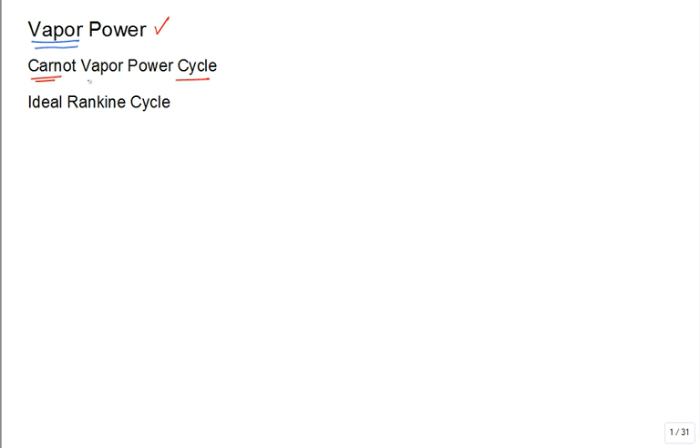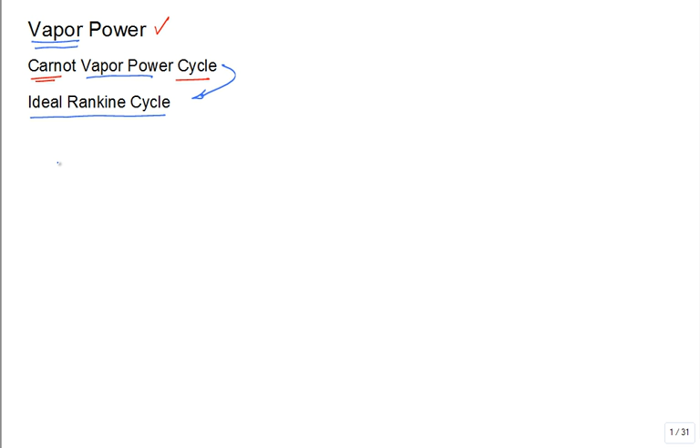To begin, we'll review the Carnot cycle, and the Carnot cycle can be implemented with a working fluid that undergoes a phase change. It doesn't have to be an ideal gas. If you look back in Thermo 1, it introduced the Carnot cycle primarily thinking about an ideal gas. But you can also look back in Thermo 1 in that previous section and you'll see, oh yeah, we did talk about the Carnot vapor power cycle. And that helps us understand what we call the ideal Rankine cycle, and then we modify the ideal Rankine cycle to be actual Rankine or vapor power cycles.

So just a quick review of this Carnot. It's named after a man whose last name was Carnot, Sadi Carnot. These are the years he lived: 1796 to 1832. And when you get older, you start taking the difference between your birth year and last year on this earth, and you find that he only lived a short lifespan of 36 years. So he did a lot of work if we're still talking about him today. And he's in every engineering thermodynamics textbook.

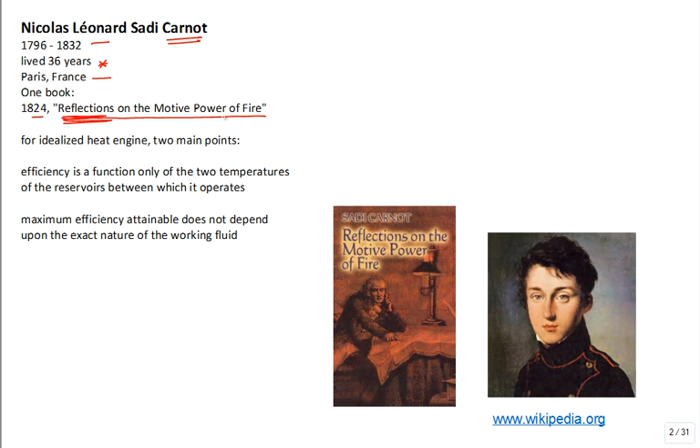So he was a French engineer. He wrote one book, one piece of work. He published it in 1824. It was Reflections on the Motive Power of Fire. So he's thinking about how you burn things to turn things, which is a novel concept at the beginning of the Industrial Revolution.

Before, if you wanted to turn something, lift something, push something, it was either human muscle or animal muscle. That's about it. You did have waterfalls, and you did have capturing the energy in a big water paddle wheel, grain mills and stuff. But other than that, it was muscle power.

But here, at the start of the Industrial Revolution, you burn something, fire, to turn something, the motive power of fire. So here's a picture off of Wikipedia, and here is the text. You can still purchase that English translation of that French paper. I think it's put out by Dover, been put out for many years, and so you can still read it. It's not, it was done a long time ago.

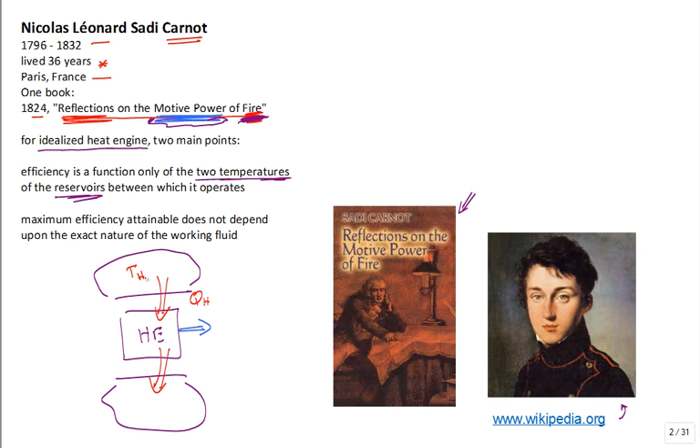It had some great things in it, but it's not spot on. It wasn't perfect in comparison to our current understanding of thermodynamics. But so he idealized, which was a big step forward, the heat engine. And the two main points: the efficiency is a function only of the two temperatures of the reservoirs which operate the heat engine. So you have a device, it's called a heat engine, and you have a thermal reservoir and a thermal reservoir, and it supplies some heat, and it has to reject some heat, and the goal is to produce power. So convert as much of this QH from the high temperature reservoir into work, which means that you need to minimize QC into the low temperature or cold reservoir.

Also, the idea that the maximum efficiency attainable does not depend upon the exact nature of the working fluid, it depends upon those temperatures. So everybody should remember that the Carnot efficiency, the maximum thermal efficiency for a heat engine operating between two reservoirs, is 1 minus Tc over Th, where Tc is absolute and Th is absolute.

There's a few things you can almost say, oh, there's a 50+% probability it will be a question on the FE exam that you must use that relationship. You must understand and be able to use it in one way, shape, or form. Think about that, I just helped you a little bit, right? You're going to take the FE exam? There you go. Don't forget that equation.

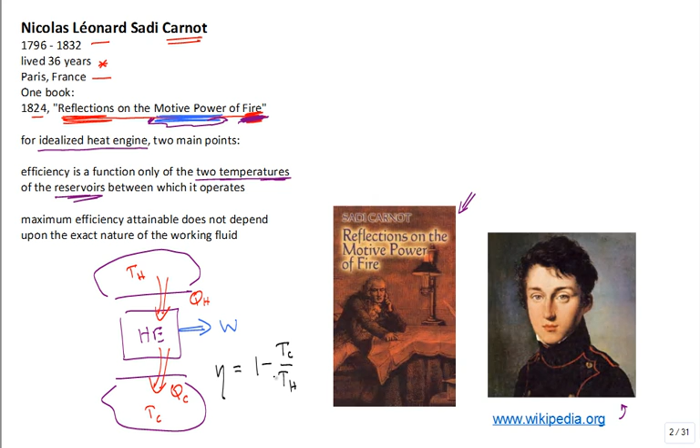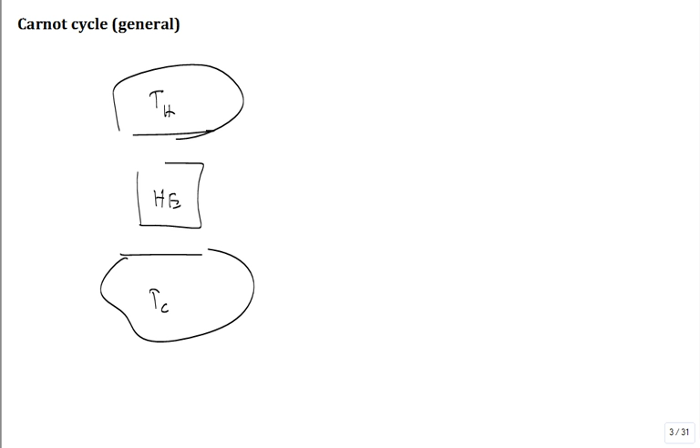So in general, I'll just re-sketch that. You have the heat engine, the thermal reservoir TH, and the thermal reservoir TC. Heat transfer QH, heat transfer QC, and the work W. Let's take a look at the first law.

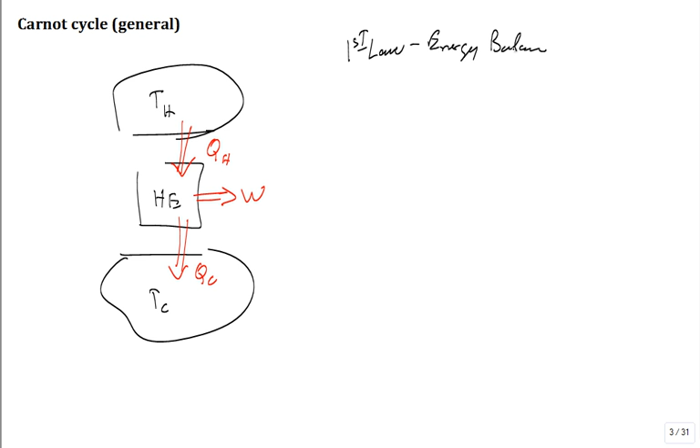Also known as an energy balance for this system. So if I take a look at the heat engine as my system, what do we see? We say that QH is in, work is out, and QC is out. True? Is that the first law, energy balance?

Let's write the second law, which is not an energy balance, but an entropy balance for that heat engine. So do we have any entropy coming in with QH, the heat transfer in? Yes, we do. What is the model, the analytic expression for how much entropy is transferred with that Q?

True or false? Is all of that heat coming in from the constant temperature thermal reservoir at TH? Yeah, all of it's coming in at one boundary temperature. It's all at TH.

Okay, do we have any entropy out with the work? No entropy transfer with work. How about any entropy out with the QC? Yeah, TC. Do we have any entropy generation, which I'd put over here?

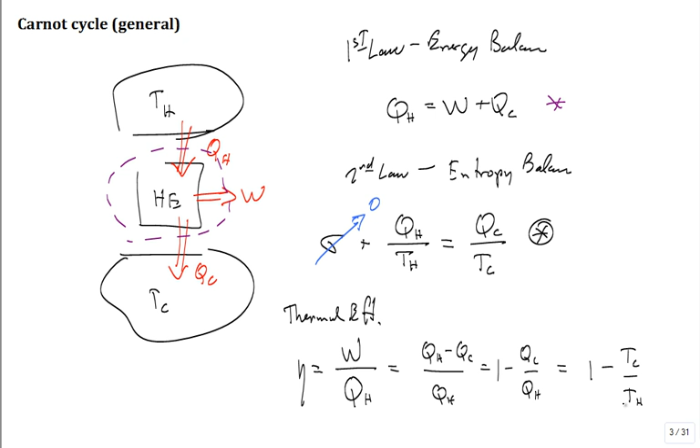So all you had to do is know the definition of thermal efficiency, first law, second law, know that for Carnot, there's no entropy generation. What are the 4 processes that go inside this box, this heat engine? Typically 4 things that are going on inside that heat engine. What are those 4 things?

Well, we're going to compress it. Compress the working substance, adiabatic. Adiabatic compression. What's that mean? No heat transfer. And we're going to do that internally reversible.

So all of these 4 are going to be int rev. If I say it's int rev, that means no friction, no entropy generation. And if I have adiabatic compression, then there's no entropy transfer with heat transfer because it's adiabatic, no heat transfer, hence it's isentropic. Isentropic compression.

Okay, followed by expansion. Okay, but what type of expansion? Isothermal. So if you have expansion and it's isothermal expansion, you're probably dumping heat in, you're bringing with it some entropy, the heat transfer coming in, but it's all coming in at one temperature, the high temperature.

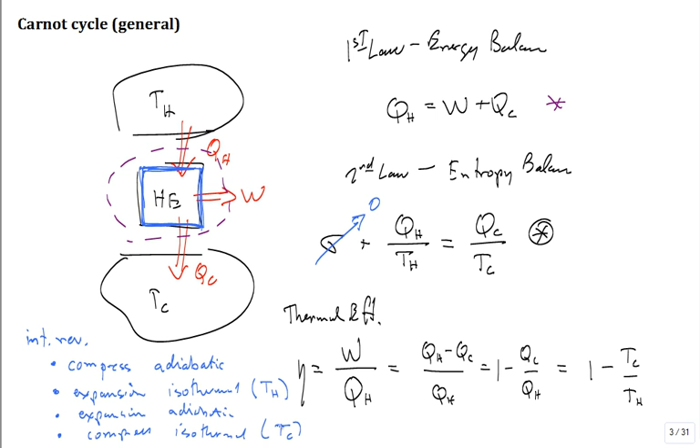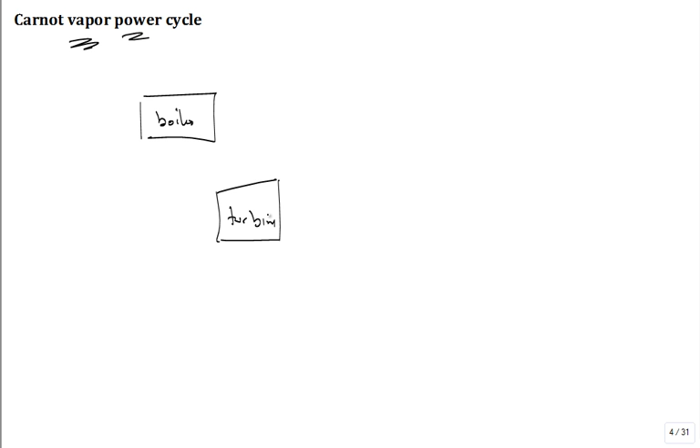So how do we implement this for the Carnot vapor power cycle? You'll have a device called a boiler, a device called turbine, and the fluid flows out of the boiler into the turbine. Then out of the turbine, it flows into a device called a condenser. And then it flows out of the condenser into another device, and I'm going to say it's a pump.

We talked last time, what's the difference between a pump and a compressor? What is the condition of the substance coming into the device? Both of them increase the pressure of the working fluid. But the pump is used to describe something that increases the pressure of a liquid. A liquid is incompressible, it doesn't change volume. A compressor increases the pressure, but it's actually changing the volume as well because it's a compressible working fluid.

So I know that I'm going to be changing the specific volume of the fluid going through this quote-unquote pump for this Carnot cycle, but I got to call it something. The device is to increase the pressure. I could put pump slash compressor. Fine. And what we have to do is we have to introduce states.

It's convenient to introduce state 1 here, state 2 here, state 3 here, state 4 there. So the fluid flows through the boiler, then through the turbine, then through the condenser, then through the pump. And what we do is we analyze each component.

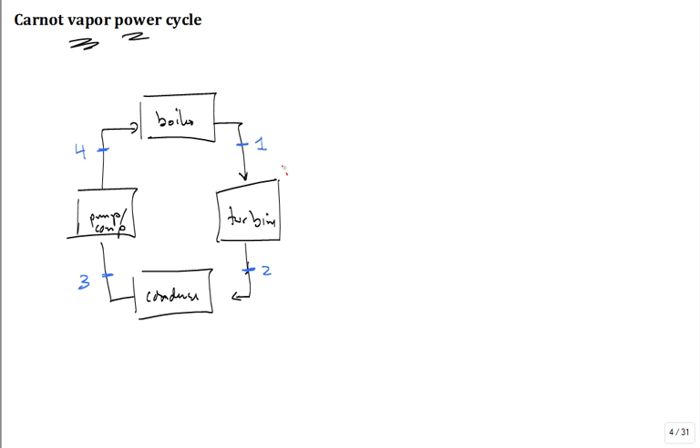We'll do an analysis of a control volume around the turbine. We'll do analysis of the control volume around the condenser. Same thing around the pump and around the boiler.

So you have to get in your mind straight: is this analysis that I'm about to perform for a closed system or an open system? It's for an open system, because you want to be able to apply the correct equations and not get tripped up. How many students get tripped up? Yeah, they get tripped up, right? So you want to get that straight in your mind, that you're going to analyze the turbine, the condenser, the pump, the boiler.

Okay, so what type of analysis would we do for the turbine? Well, what is the turbine? Isn't it a work-producing device? And what we'll do is we'll use a lowercase w subscript t. Lowercase w instead of cap w. Why lowercase w? What's the syntax? What's our notation?

Specific work. So this would be the same as the power out the shaft per unit mass flow rate through the device. True or false? Yeah, so it's the power out the shaft of the turbine per unit mass flow rate.

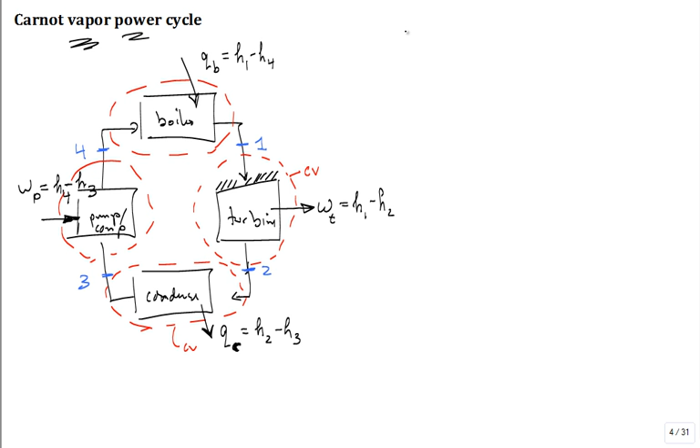Rattle off from memory a list of properties. What's number one property, first on the list, top of the list? Temperature. Another property, second on the list. Pressure. Another one. Specific volume, internal energy, enthalpy, entropy, flow exergy. You could keep going.

You could put in any specific heat. You could put in a couple more properties, but I'm thinking expansivity or compressibility, but some of those we haven't covered yet. Are there any other properties we have already covered this semester? Ratio of specific heats, it's just a property, that's all. Is there any others I'm trying to think of?

It helps you sometimes when you're lost, say, I know this state, I need to fix this state and get the enthalpy from that state. That's what I want. I know the state principle, 2 independent intensive properties fix the state. Theoretically, I'm able to then get the property that I want. Which 2 do I know? Make the list and start checking down the list.

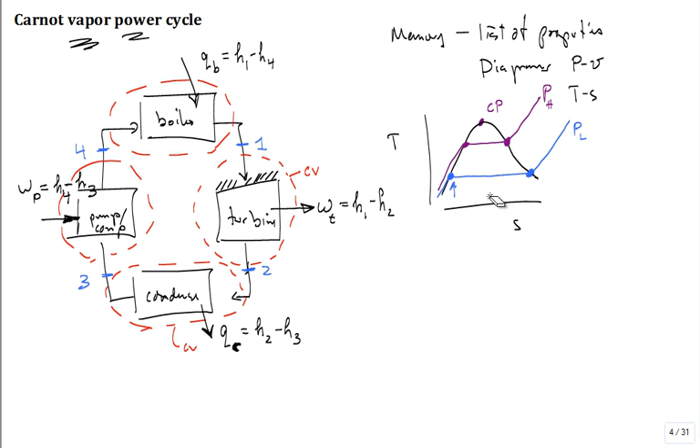True? Okay, now this is a very funny thing you may recall about the Carnot cycle. All of the heat has to be brought into the cycle at a high temperature.

Let me try and draw this at a different color right here. Think about this high temperature thermal reservoir. You can't have high heat transfer coming in from TH going into a cold fluid in the boiler. The fluid in the boiler has to be at TH, has to always be at TH.

That seems like an oxymoron, seems like it's impossible, it can't be done. It can be done. How do you get heat to continue to go into a working fluid without the working fluid changing temperature? The temperature of the working fluid in the boiler stays TH. That doesn't make any sense, professor, this is crazy, I want my money back, the thermodynamics textbook doesn't work. No, what happens, how does that work?

The energy is being transferred into state change rather than temperature change. Perfectly said, it's changing the phase, it's changing the phase from liquid to vapor at constant pressure.

So what do you think would be the maximum coming out of the boiler and the minimum coming out of the boiler? Both of them are at high pressure. State 1 and State 4 are on the line of PH, the high pressure line. But where is State 1? Where is State 4? State 1 is the maximum to the right. State 4 is the maximum to the left, but it has to stay at TH. Right here is TH. So this is State 1, and this is State 4.

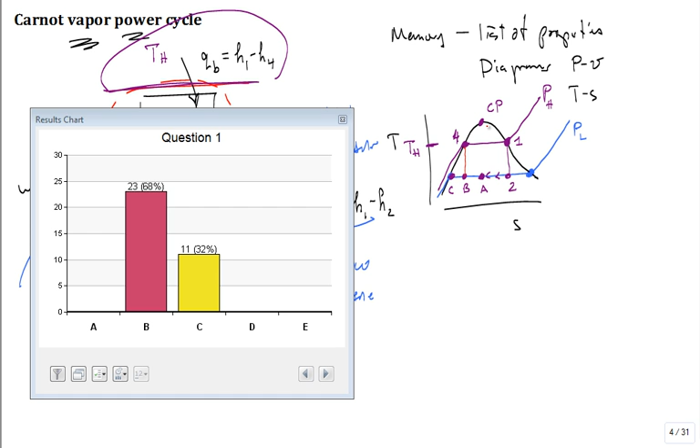See, those students, 32% of the class, are a little ahead of you. Yeah, they're accelerated - already reading ahead, thinking about the next section, the ideal Rankine cycle. So for them, they need to save that answer. They'll get it right next time.

Okay, so there you go. You stop at this point, so that point is state 3. Then you go up through the pump to state 4, through the boiler to state 1, through the turbine to state 2, down to the inlet to the pump through the condenser to state 3. So there's the cycle. What does that cycle look like, the shape on the TS diagram?

Looks like a box, some sort of rectangle. I didn't say a square box, just a box, okay? Two sides, both sides - they're parallel to each other, and it's a 90-degree turn on that temperature entropy diagram.

What temperature is the working fluid from state 2 to state 3? TC, the low temperature. What is the working fluid from 4 to 1? TH. So all of the heat is brought in at TH, and all of the heat is rejected at TC.

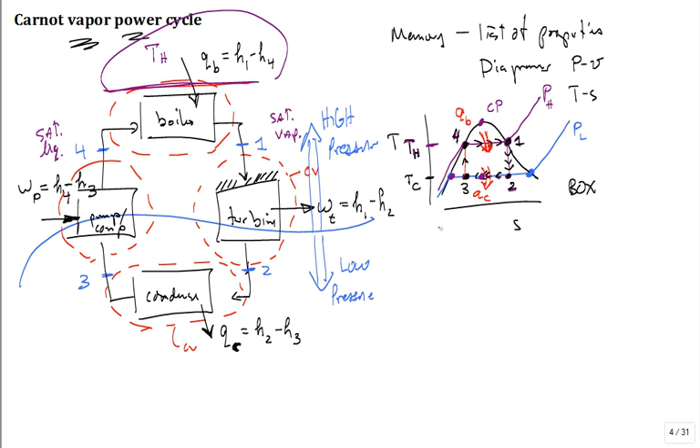We want to solve a problem. So when you think you understand the material, solve a problem. When you solve a problem, start with a clean sheet of paper and the problem statement. Don't fall into the trap of reading the solution that somebody else worked out and think that's learning. It's not learning, because unfortunately during exam time, I don't give you a solution and say please read it and see if you understand it. You have to solve your own problem.

So, water is the working fluid in a Carnot vapor power cycle. The boiler operates at 8 megapascal and the condenser at 20 kilopascal. That sets the high pressure and low pressure - high pressure is 8,000 kilopascal, low is 20 kilopascal. Determine the work developed by the turbine and the pump.

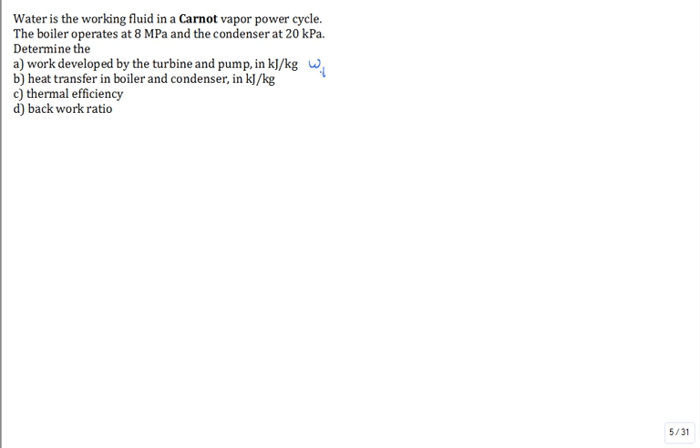So we're going to look to solve for WT and WP, both I want to be positive quantities. One is the positive work out of the turbine, one is the positive work into the pump, both per unit mass that flows through it.

Heat transfer in the boiler and the condenser - QB positive into the boiler, QC out of the condenser, positive out of the condenser. Then the thermal efficiency, eta, the Greek symbol, is our typical thermal efficiency.

What's our thermal efficiency defined as, a ratio of what we want? What do we want? A large net work out. What do we have to pay for to drive the system to make it work? QB, heat into the boiler. Is that net work what comes out of the turbine minus what goes back to feed the pump? Is that true? It is true.

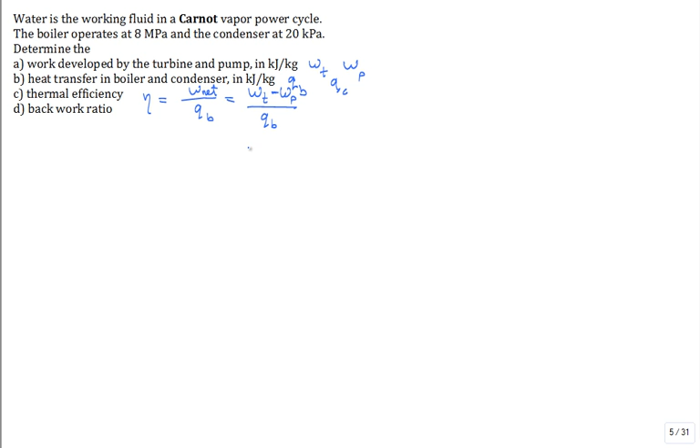Okay, and then the back work ratio - how much that came out of the turbine has to go back to feed the pump? That's the back work ratio. Both of them are works. One is what had to go back into the cycle. Instead of everything that came out of the turbine, we'd love to just make electricity and sell it and make gobs of money, but unfortunately some of that has to go back to make the cycle work by feeding the pump.

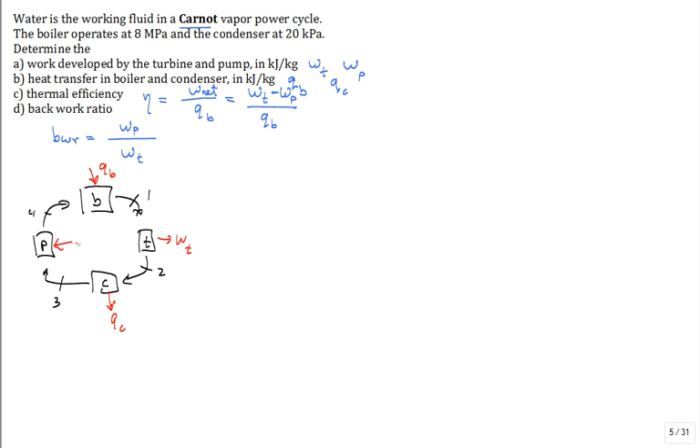So this is a Carnot cycle. In our mind, we think of our 4 components laid out, the working fluid flowing through those 4 components: state 1, state 2, state 3, state 4. This is our boiler, this is our turbine, this is our condenser, this is our pump, and the directions of the heat transfers - this is Q sub B, this is Q sub C, this is WT, and this is WP. True? Okay. Now you also probably want to sketch from memory that property diagram, the temperature entropy diagram.

Think of 2 temperatures, TH and TC. Put a dome on it. Put lines of constant pressure. And go ahead and put our state 1, state 2, state 3, state 4, and you know which direction the cycle's going. All right.

We know that if I want to calculate this W sub T right here, I really want H1 and subtract H2 from it. If I want to calculate the work, maybe I should put that over here. If I want to calculate the work of the turbine, I need the enthalpies, H1 minus H2. If I want the work of the pump, it's going to be H4 minus H3. True or false? Did I write both correctly, or did I make an error?

Correct or incorrect? And then if I want to calculate the Q in the boiler, H1 minus H4, and the Q in the condenser, H2 minus H3.

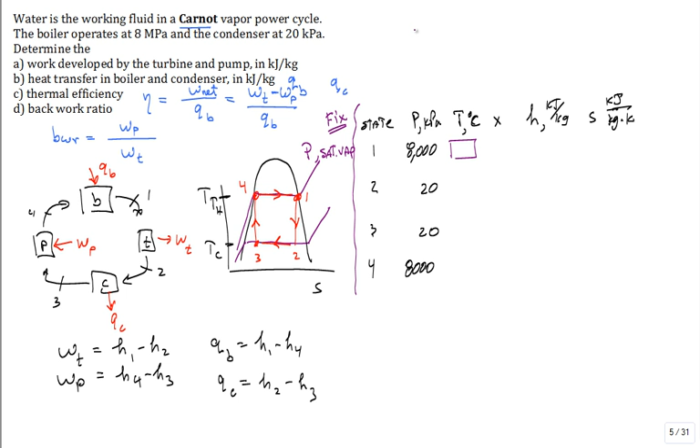So we have a pressure of 8 megapascal. Good, and I said it's 8,000 kilopascal, and everybody said, Professor, you did that property conversion correctly. I flip to the table, and I want to use the steam tables with pressures given in BAR. I'm going to pause right now, walk around the room, and I want people to write down what the pressure is from memory. Make that pressure conversion and tell me what it is in bar. This is one of those pressure conversions you need to get down with confidence if you haven't already.

So when we convert this, what was the consensus? 80 bar. Some people had, oh man, I don't know - I don't even want to repeat some of the answers. But this problem of pressure conversion is so tricky that the newer edition of the textbook, which I don't have a copy of, actually put a little convenient reminder on how to convert pressures in table A2 and A3. True or false? True. They didn't have it in the 7th edition. If you look at that appendix, that's the 6th edition - it doesn't have that little pressure correction or helpful reminder.

True? Is that the newer one? Yeah, that's the 8th edition. So why did the publisher do that? Well, the author of the textbook said, I'm getting a lot of faculty saying students mess up the simplest of the simple pressure conversions. Or maybe they do have it in the 7th edition - they added it maybe in the 7th edition. So this needs to be 80. So when you come in, if you have your table, what is Tsat at 80 bar?

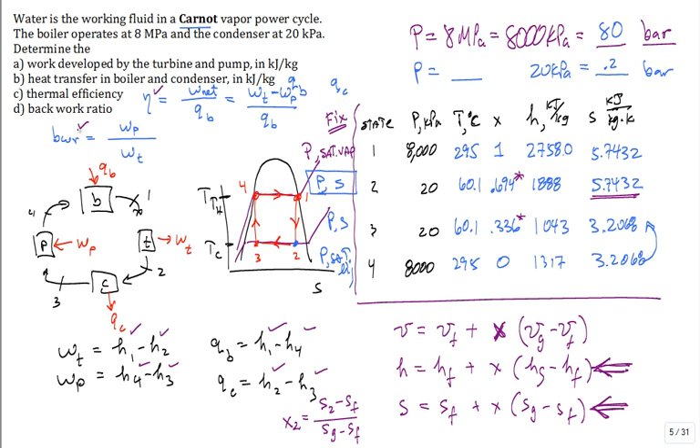And so this is for the Carnot cycle. What I do is, there's the state 1, 2, 3, 4. This is a little information about how to help me recall what was the key information to fix that state. Oh, it was pressure and saturated vapor. Oh, P and S, pressure, saturated liquid. And then here's the pressures, temperatures, quality. I threw that in for fun because it's nice to see how things expand and change volume.

When you go through that turbine, look at this. Is there an expansion of the steam going through the turbine? Yeah, quite a bit, right? And then what happens is you go through the condenser. It's condensing, turning into liquid state—well, not all liquid, I'm sorry. This is still a two-phase mixture, it still has quite a large volume. And then from 3 to 4, it goes through that pump, so it's being compressed quite a bit. But these are the critical H's and S's.

Here are the work, heat transfer, work of the pump, heat transfer in the boiler, the net work. I always do this whenever I'm solving a problem: if I've got all the W's and all the Q's, I'll calculate work net and I'll calculate Q net. Why? Because if they're not the same, what do I look for?

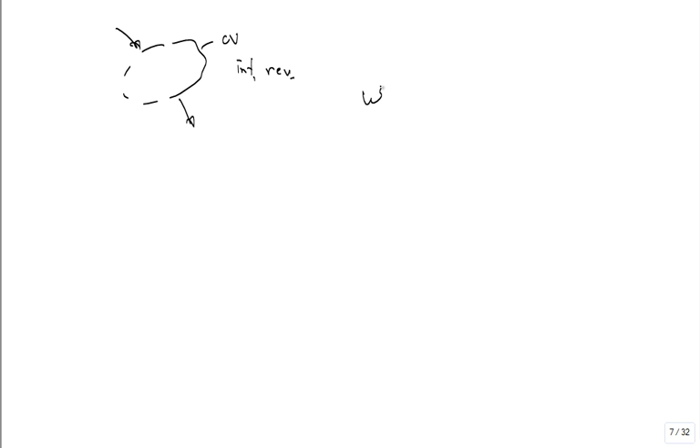Insert new page. At the end of chapter 6 in this thermodynamics textbook, they have a general analysis of a control volume in which you have fluid flow in and fluid flow out. And then they say, let's limit this description to an internally reversible process in that system. And then we'll take the first law and the second law, and we'll combine them a little bit with emphasis on the first law and energy balance, and we'll get an expression like this, lowercase w: work per unit mass coming out, because that's our typical sign convention. And that's equal to W dot per m dot, and that's equal to negative integral V dP. And then you also had a change in kinetic and potential energy, but often those are negligible. It's this integral VdP that is key.

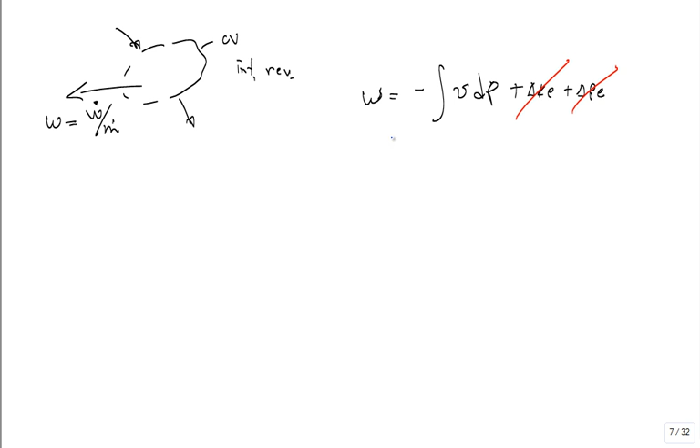Okay, now, the first time I saw that equation, I said, no professor, it's the integral P dV. Now you got it correct. Oh no, what is it - is it VdP or PdV? All right, we're going to vote with clickers. Version A or version B. You have to find your clicker and vote which is correct, version A or version B.

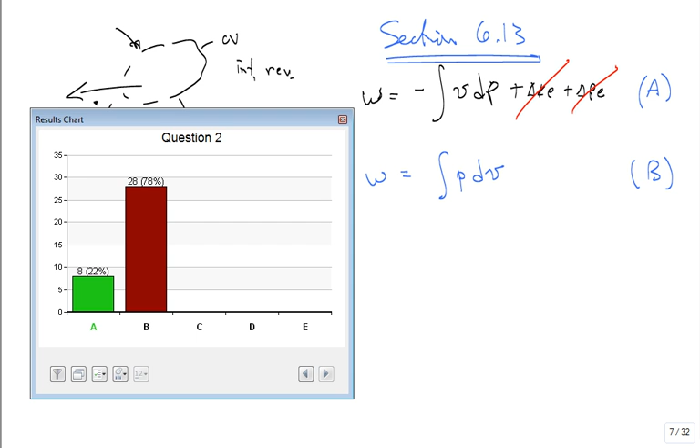To understand why it's cheaper to boost the pressure of an incompressible substance versus a compressible substance, we really have to master this concept. When you see it, you think, this is wrong, it's backwards. This is right. I know, that's why I asked the question. First time I saw it, I thought this is wrong, it's backwards.

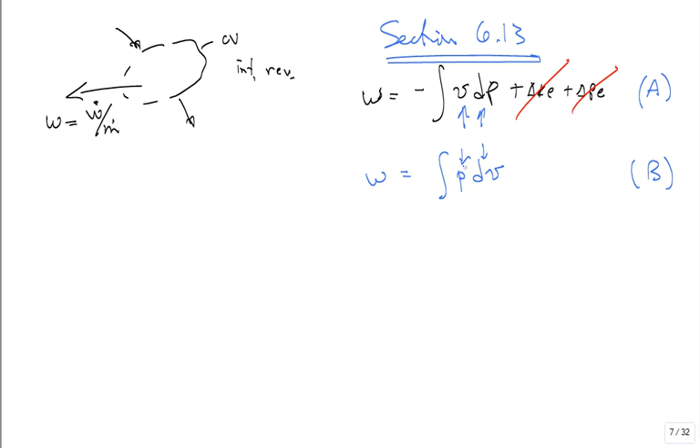I understand a piston in a cylinder with a trapped amount of gas, and as I do work, it's boundary work, I have an integral P dV. That's correct for a closed system, changing volume. But is this an open or a closed system? Open system.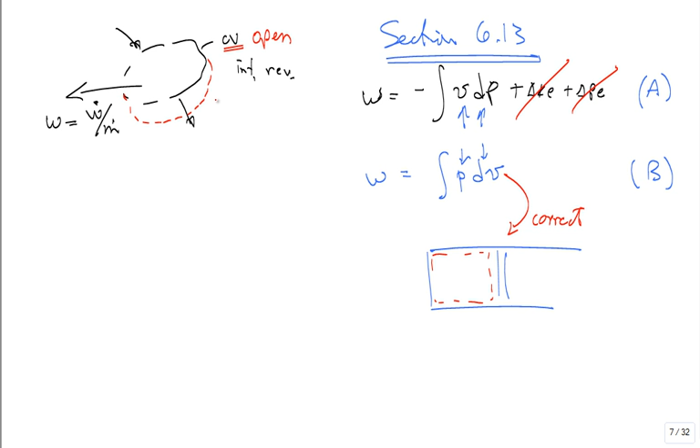Things change a little bit. I don't use U's, I use H's. When I'm looking at the work, it's not the integral P dV. There's no boundary work. Is this control volume expanding? Hold it, slow down. Is the control volume expanding like this control mass was expanding when I pushed back the face of the piston? This control volume doesn't expand.

The specific volume may change from inlet to outlet of the substance, just like the temperature may change from inlet to outlet, just like the pressure may change from inlet to outlet. So what I have to do in order to analytically use this expression -- whoops, that's the wrong one -- this one only works for an internally reversible expansion. That's the best way of thinking about it, even though it could be compression.

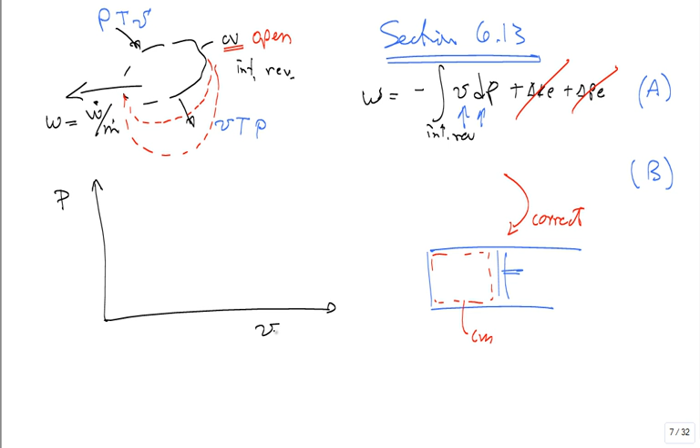And now I have to do the integral V dP. So I think about a property diagram. I could do this property diagram. Okay, well, if I do this property diagram, let me do it for the hard case. Let me put out here the dome. True? When you have a dome on a PV diagram, this side kicks way out. It is not close to symmetric.

To make it look symmetric, we'll put the x-axis on a log scale. But otherwise, it's really kicked out, it's really stretched. It's very steep over here and very kicked out over there. That's the true look or shape of a PV diagram.

Now, for our Carnot cycle, we started here, high pressure, saturated vapor, that's state one, true? And then what did we do? We expanded to low pressure. I got to go from this high pressure right here, pH, to the low pressure, PL. All right, well, where is state 2? Not so easy.

Because entropy is constant during the expansion from state 1 to state 2. But I recall that the quality was 70%-ish. So I'm going to show here is state 2, and I know I didn't kick out that tail far enough. I really should kick it out, go like this, and then way out. Okay? So there's state 2.

I still don't like where it looks, but it's hard to show things accurately. Whoops, I got to get down to the right pressure. There, that's state 2. This is all the same pressure. Okay, there's state 4. Now I condense it, but I don't condense it all the way to state 3. I condense it right there. True? Then I boost the pressure.

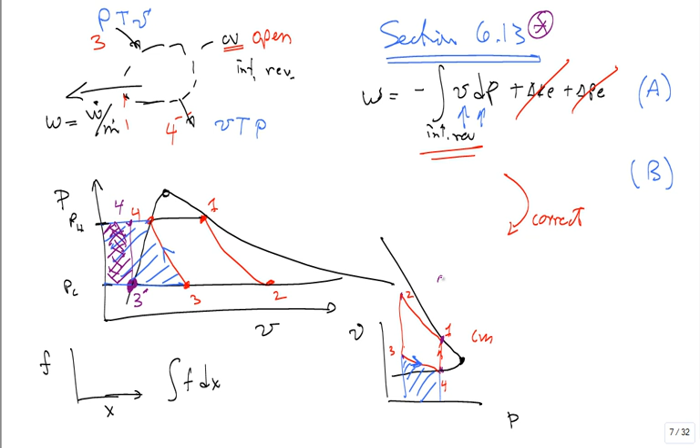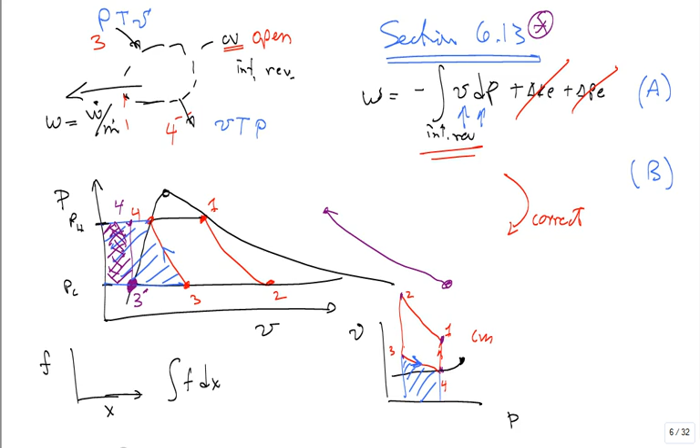So this is the key section, please review it. And to test it, take a couple things. Take superheated vapor, you don't have to have it in the dome. Put state 3 way out in the superheated region, compress it up to the same pressure. You'll find that it's expensive. Take an ideal gas way out, compress it, it'll take a lot of energy per unit mass. Take liquid water, compress it - very cheap, very inexpensive, same pressure difference. So I guess I tried. Did it help? Hopefully it helped.

Let's move forward, let's put this on a real TS diagram. This is real data plotted as accurately as MATLAB can plot it. So what was our pressure? Well, first let me review the entropy diagram. You have temperatures, 0 degrees C, 100 degrees C. What is 100 degrees C? Boiling point of water. What's 0? Ice point. Okay, you look at this, temperature way up here, that's very hot.

Can you, let's take a look at this point as review. What is the name of this point? Critical point. What temperature roughly is that in degrees C? 374-ish, 375-ish. Can I have, as a review, a two-phase mixture in equilibrium, water at 500 degrees C and 50 megapascal? Can I have it at that pressure and temperature? Yes, I can, but it's not a two-phase mixture. It's some description. How would you describe water at 500 degrees C and 50 megapascal? It's supercritical.

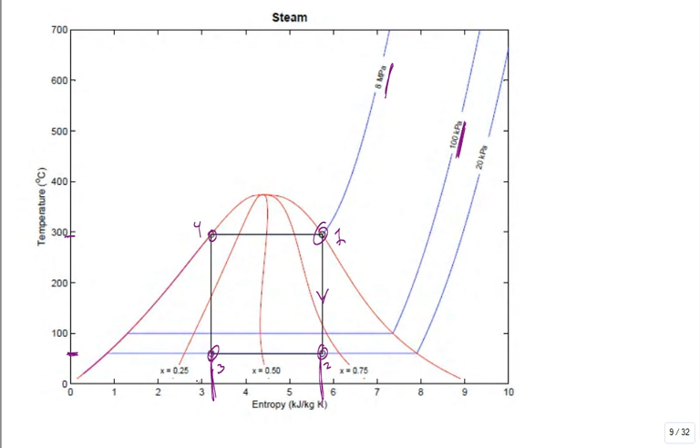Now that we've mastered that, let me go back to this diagram right here and ask a question. I have a failure of a tube in the boiler. It springs a hole. A hole develops in the tube of the boiler. So I ask this question, answer A or B, got a 50-50 chance. A hole develops in the tube of the boiler of this running cycle.

Does steam rush out, or does air that's in the room rush in? I develop, unfortunately, a failure, a hole in the tubes of the boiler. Does steam rush out, or does air rush in?

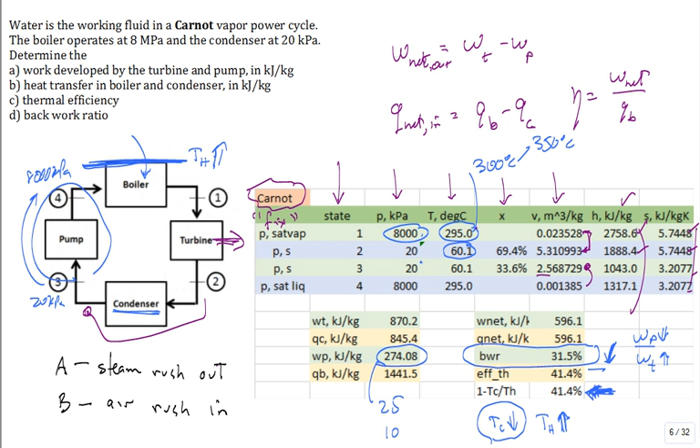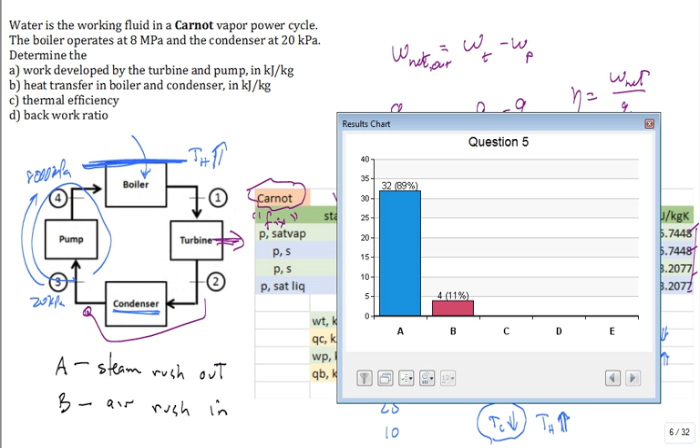So let's show the results. And we have 11% that are... only 4 students are somewhere there. They intended to hit A, of course, or something. So why does the steam rush out of the tubes in the boiler when there develops a failure, a hole? It's a higher pressure.

Ready to move on to a practical Carnot? Is there a situation with atmospheric pressure? Absolutely. But for efficiency purposes, we want to drop that low temperature below 60 degrees C to 40 degrees C. But if you want to throw away heat to atmospheric temperature, but you're throwing it out of the steam at above 100 degrees C, you're really inefficient. So that's when the condenser pressure would be higher than 1 atm.

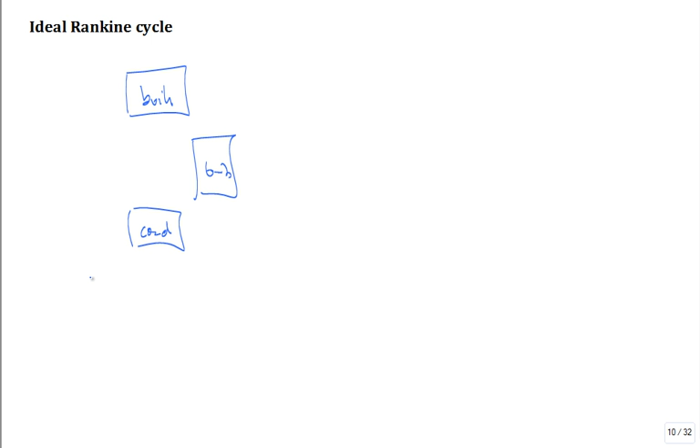Let's now talk about the ideal Rankine cycle. What we do is we say we like the boiler, yes, we like the turbine, yes, we like the condenser, but we need to let the condenser do all of its work. We need to let the condenser produce saturated liquid. Why? Because that little device called a pump loves liquid. It does not like two-phase fluid. And the work to drive the pump is a lot less if you feed it saturated liquid.

Theoretically, it's a lot cheaper to boost the pressure of something that's incompressible than something that's very compressible, like air or steam or a two-phase mixture. So it's going to be very efficient to run that pump.

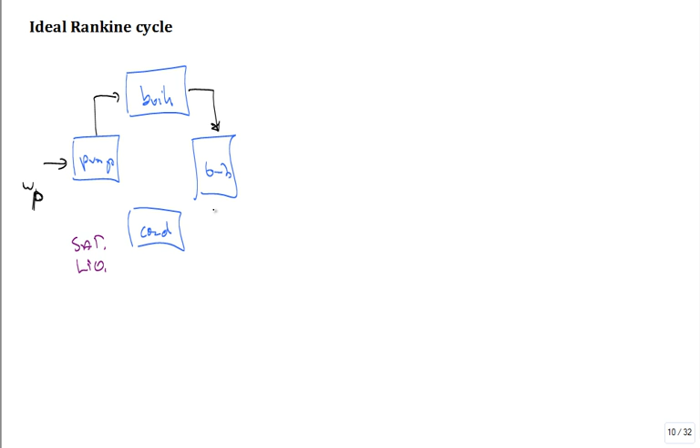We'll still have the fluid flowing in that direction, going around. We'll still call this state 1, state 2, state 3, state 4. We'll still have the heat come into the boiler. That's going to be enthalpy 1 minus enthalpy 4. Out of the turbine, that'll be enthalpy 1 minus enthalpy 2. Out of the condenser, that'll be enthalpy 2 minus enthalpy 3. And work into the pump, enthalpy 4 minus enthalpy 3.

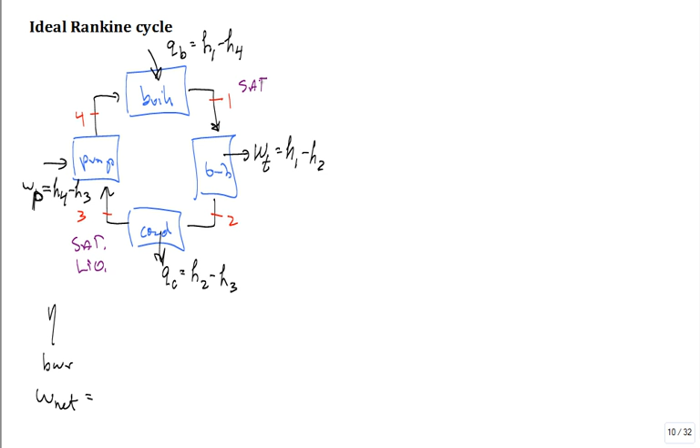Now, the cycle efficiency, the backwork ratio, those are all the same. The net work, those equations haven't changed. What's changed is state 3 is saturated liquid, not state 4. Also, we need to fix state 1. Let's still leave it as saturated vapor, state 1. I know that we're going to superheat it in a minute, but we take baby steps.

Okay? Now I take and make a property diagram, or a table I should say, of all my states: 1, 2, 3, 4. I then say what is used to fix the state. State 1, what is known? Pressure, saturated vapor. What's state 2? Typically pressure and entropy. What's state 3? Pressure, saturated liquid. State 4, pressure and entropy. And so we have pressure, temperature, quality, enthalpy, entropy, and you work through and fill up that table.

But it's a little different because state 3 is different than the Carnot. When you see ideal, that means it's internally reversible. So the turbine, the S going through the turbine, S1 and S2 are the same. Second law analysis around that turbine: S2 is equal to S1.

Great. Also, around the pump, S4, S3 is equal to... let me do it this way. S4 is equal to S3. Okay? So the S's are the same. So that helps us analyze this system. We don't have any irreversibilities in the turbine or the pump, when it's an ideal Rankine cycle.

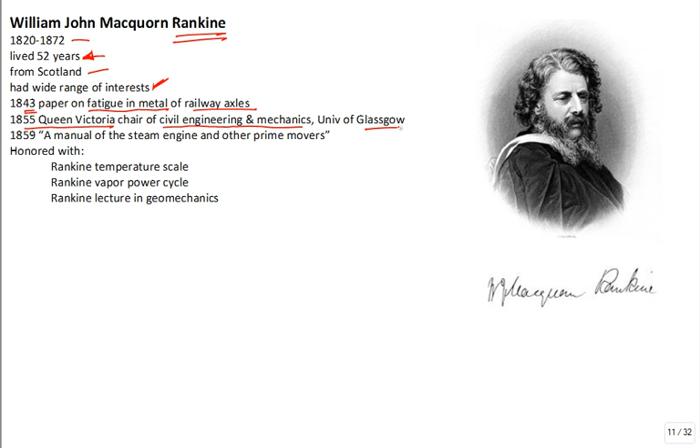He was from Scotland, north part of the UK. Very wide range of interests. Did a very important paper on fatigue and metals, on railroad axles. He was named by Queen Victoria chair of Civil Engineering and Mechanics at the University of Glasgow in Scotland. In '59 he put out a manual of the steam engine and other prime movers. So from fatigue to thermodynamics, he did a lot.

That is why we honor him with the temperature scale named after him, and the vapor power cycle named after him. There's also an International Geomechanics lecture series that carries his name.

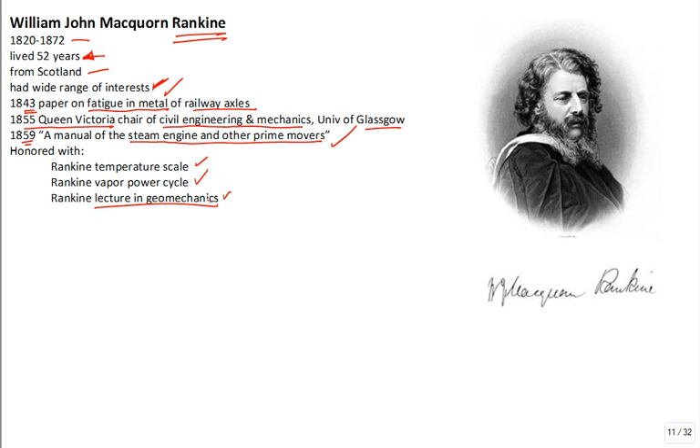Let's solve this problem. It's the same type of problem, but instead of the Carnot cycle, it's an ideal Rankine power cycle. We have 8 megapascal for the boiler and 20 kilopascal for the condenser, and we want the same answers: the work developed in the turbine, the work needed to drive the pump, and the heat transfer in the boiler and condenser.

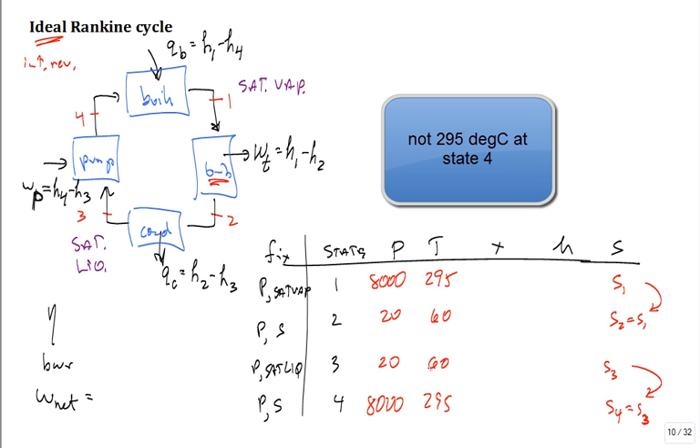I'm going to jump back and solve that problem on this page because I have more laid out here. So what would we have for our pressures? 8,000 and 8,000, 20 and 20. 295, 295, 60, 60, right? Remember those numbers? All right.

Now what about the quality? State 1, 100%, it's saturated vapor coming out of the boiler. Where else is the quality known? At state 2, 3, or 4? State 3 is 0, it's saturated liquid.

So this is H of F at 20 kilopascal. This is S of F at 20 kilopascal, true? And if I go back up here, this is H of G, saturated vapor enthalpy, and this is S of G, true?

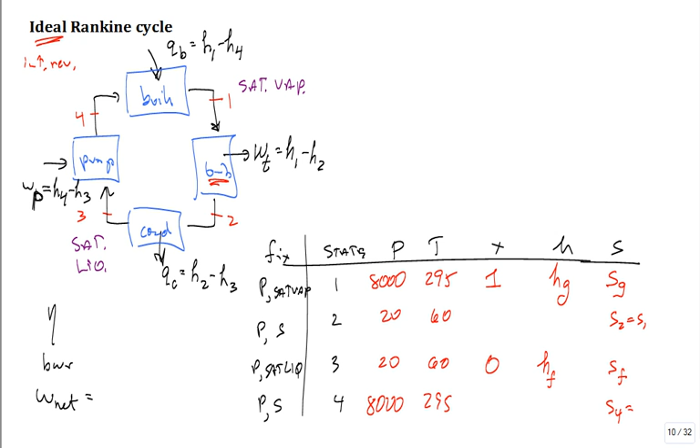Then we would say, to get the quality at state 2, that's S of 2 minus S of F, divided by S of G minus S of F. All of these saturated values are at 20 kilopascal. And S of 2, we already determined, is equal to S of 1, which is equal to S of G at 8,000 kilopascal, or 80 bar.

Did all that make sense? Okay, so you then get that this quality at state... let me check, it should be the same as what we had before, 69%, right in that vicinity. And this enthalpy comes in, and these can fill up the table.

It's really different at state 3 down here, this is 0. So with a computer program, it's okay to say S of 3 is equal to S of 4, S of 4 is equal to S of 3, and then ask it to calculate.

But what about state 4? Describe state 4. I ingest into the pump saturated liquid. What comes out of the pump? Compressed liquid. Here's a question for you.

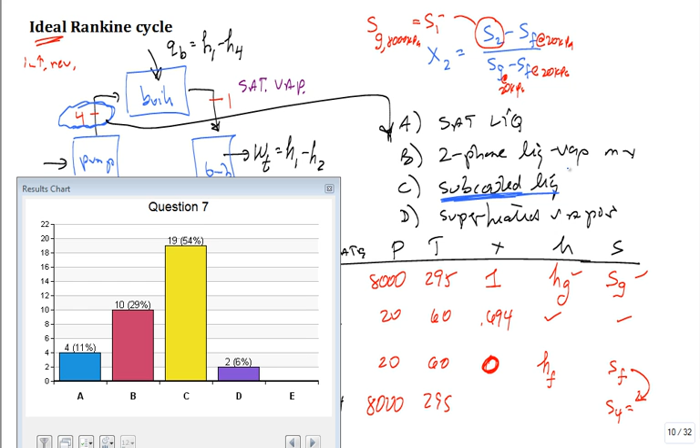So what is a different way of saying subcooled liquid? Could I have also said it was compressed liquid? What's the difference? Perspective, that's all. It's either, you could call it subcooled or compressed liquid, it's the perspective. So 54%, congratulations.

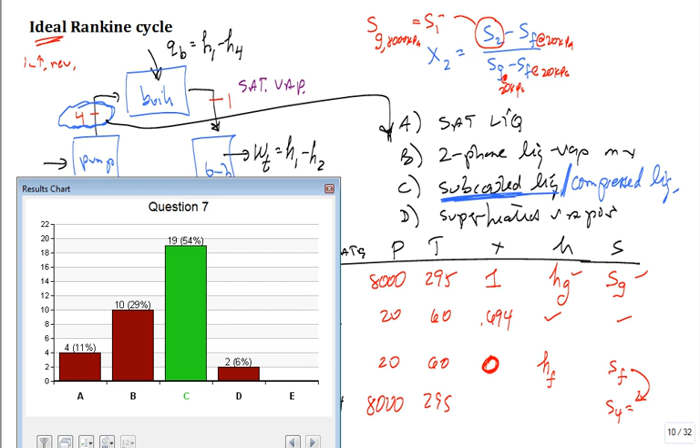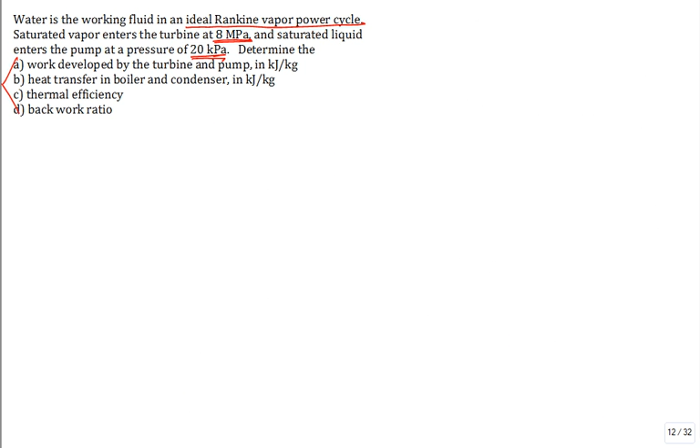And how could I tell more definitively? Well, do this: look on a property diagram. Let me see if I can... forget it, let me go do this. Here is the solution to the problem that we just worked on. I'll make a couple observations. The S values are the same between 3 and 4.

This specific volume was much lower, ingesting very dense fluid into the pump. That's a liquid—it kicks out a very dense fluid going out of the pump, essentially incompressible, but not perfectly.

Nothing's perfectly incompressible, true. But look at the enthalpy—it goes up some. What about the temperature? Very little. It didn't go up a degree C, did it? A half a degree C—less than a half a degree C. It went up 0.3 degrees C. Okay?

You can make the computations here, but what really stands out? What about that back work ratio? It's 0.9%. Is that a lot or a little? It's very little.

What did it used to be for the Carnot, the back work ratio? 31.5%—a third of what the turbine put out had to go back to feed the pump to make it work for the Carnot. Here for the ideal Rankine, just because it's coming out condensed out of the condenser, the pump takes very little work. It only takes 8 kilojoules per kilogram, so it takes less than 1%, 0.9%. Very little. That's a big impact.

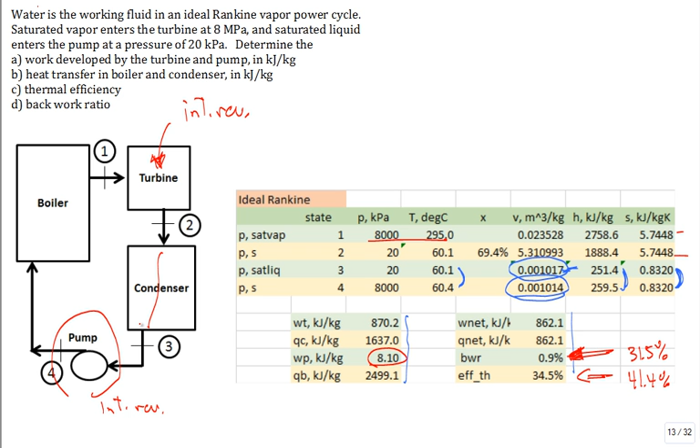Professor, the ideal Rankine cycle—it sure would be nice, because I recall the thermal efficiency of the Carnot was a nice simple equation, 1 minus Tc over Th. True? Do we have a thermal efficiency for the ideal Rankine cycle, maybe 1 minus T over T or some other simple analytic expression? Do we have anything in our textbook like that? Nope, we do not.

Why can't we get something like that? Why isn't this the same? Why is there a difference? There's going to be more heat put into the boiler, that's true, and more heat rejected in the condenser, but when I do the net balance, if it's maximally the best turbine I can put in and the best pump I can put in, why don't I get the same efficiency?

I'll give somebody—one person—who would like to try to describe why. They raise their hand, I'll call on them. Otherwise I have to answer my own question. But here's your chance to try. Anybody? You would like to try? Let's give it a shot.

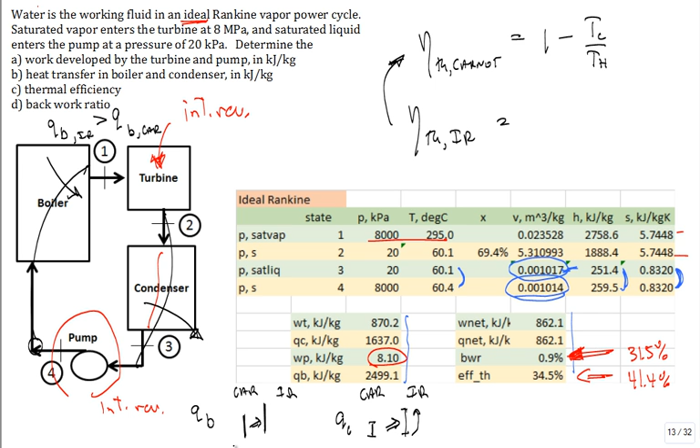I got to go to this diagram. What's the name of this diagram? A temperature entropy diagram. Now I really need to expand, and I'll show you all of these states for the cycles, the two cycles. What did the first one look like? The Carnot, it had around 8 megapascal. It looked like a box. It went like this, true?

What does the ideal Rankine look like? Same state 1, same state 2, so that's not changed, right? But we come all the way over and we condense it to right there. That's new state 3. Instead of stopping there for 3, we go and we stop there for 3, true? The hard part, this is the hard part.

Don't call it out. This is state 4 for the Carnot, true? Where is the new state 4 for the ideal Rankine? Now this is a clicker question. Let me change color here. The new state 4 for the ideal Rankine, is it closer to A, closer to B, or closer to C? Is it located in the region where I circled around point A, circled around for B, or circled around for C? Where is the new state 4 for the ideal Rankine?

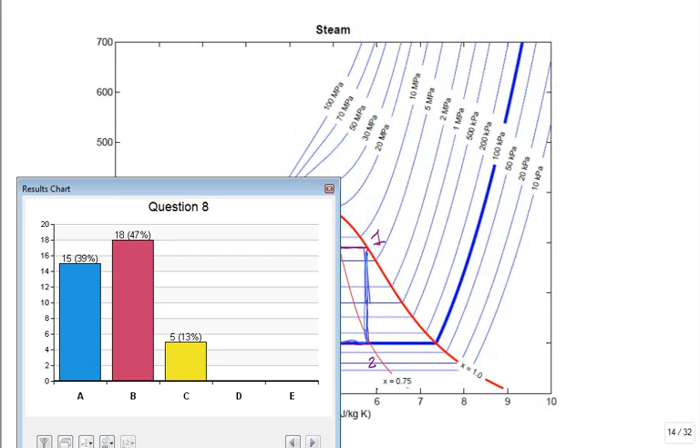Am I out of time? I got a lot more to cover. All right, now can all those answers be correct, or is there one answer that's correct and the rest wrong? A, A is correct. Let me go out of here. Read the book. I'm sorry, I'm a minute over. Don't we end at 9:50? Is it 9:52 right now? I'm what? Oh, I have 3 more minutes.

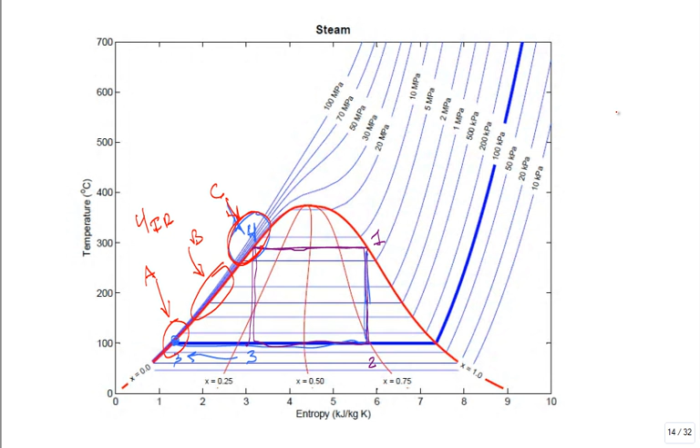Okay, here's the answer. This is state 1 on the ideal Rankine. There's state 2, there's state 3. Do you see the circle? There's another circle for state 4, can you see the circle? It is plotted, MATLAB plotted it. Where's the circle? You got to zoom in.

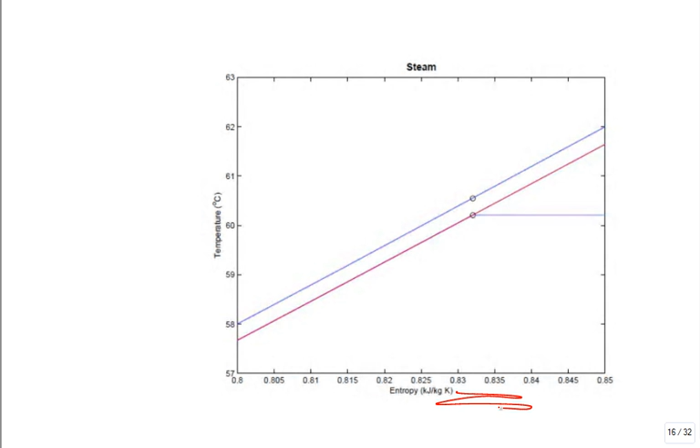All right, so this is zoomed in. This is state 3, this is 60.1. What was that temperature? 60.4 or something. 60.1 versus 60, that's state 4. Go back and look, yeah it goes 0 to 100, 100 to 200. No wonder I can't see them, but there's 2 points laid there, isn't there? So guess what?

That's the explanation. This line right here, what line is that? Is that a line of constant pressure of 8 megapascal, 80 bar? It is. So going back here, I go along a line all the way up here. I hit that point, it starts finally to boil in the boiler. What's it doing to go here? I got to heat it up, from 60 to 70 to 80 to 100 to 200. I got to heat it up to 295 before it starts to boil.

Am I bringing all of that heat into the cycle at the highest temperature, or am I bringing a lot of heat into the cycle at a lower temperature than TH? What was good for the efficiency? TC, throw it all out at low temperature. TH, bring it all in at high temperature, but I brought in a large fraction of that energy coming into the cycle at a temperature significantly below TH. That's one motivation for the enhancements to the vapor power cycle we study for the rest of the chapter. Thank you for your attention.

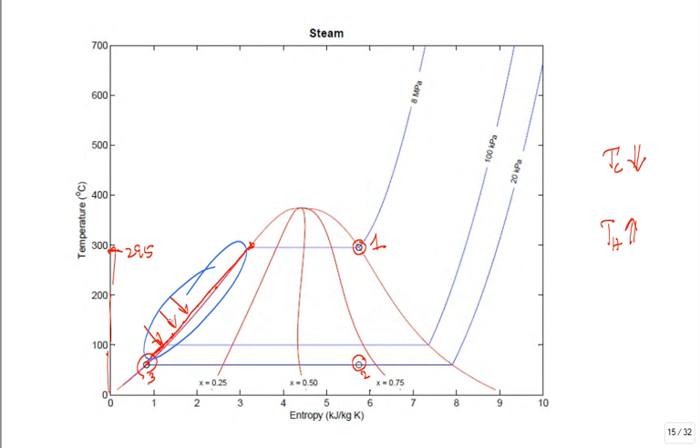Does it say 4S for the ideal Rankine? This is 4S. Yeah, straight up on, yeah.